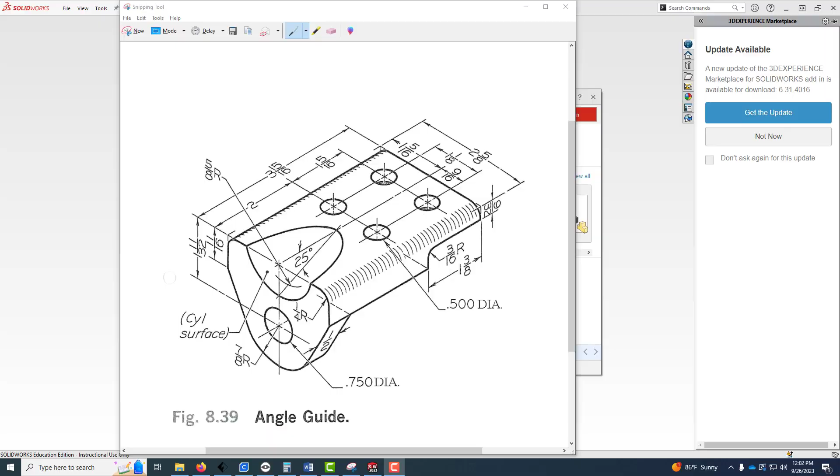Always get a game plan. Here, I'll start on the right plane with the mid-plane extrusion. Next, I'll add the end feature with the hole.

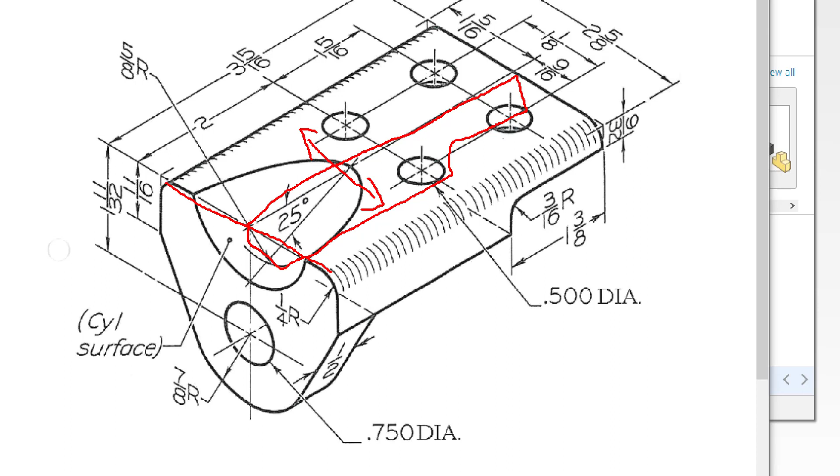This slanted cut is the troublemaker, but SOLIDWORKS allows you to define the extrusion direction. The holes are straightforward. I'll make one and pattern the others.

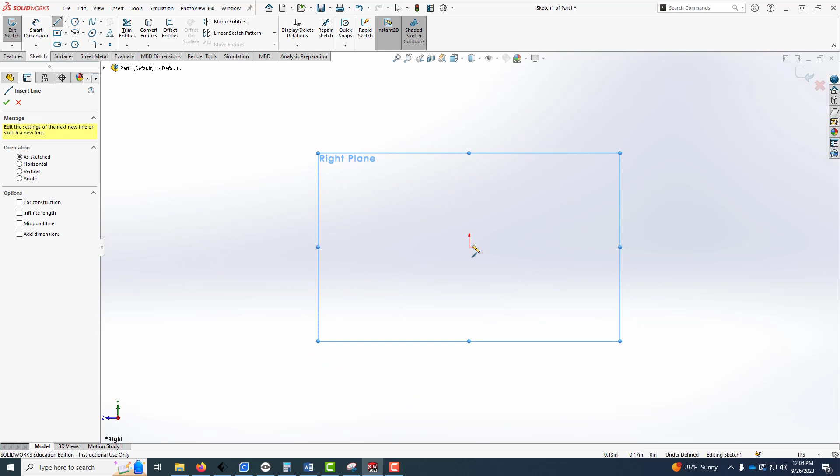Start a new inch part and sketch on the right plane. It's very important to fully define your sketches. Always anchor them to the origin and then add relations and dimensions.

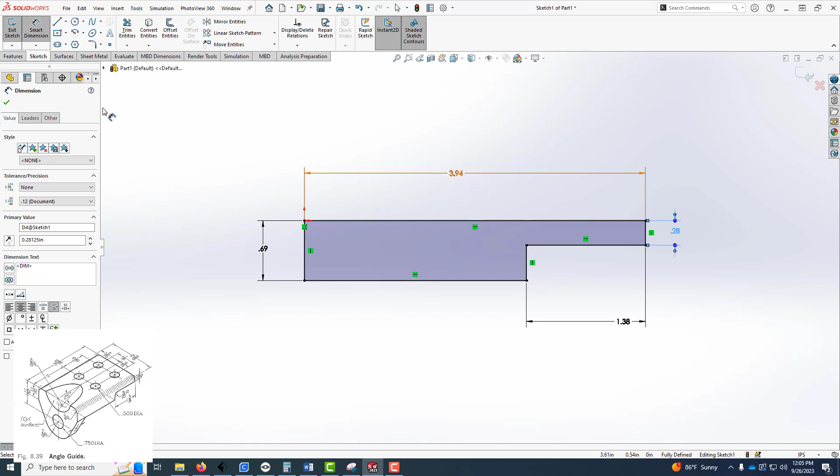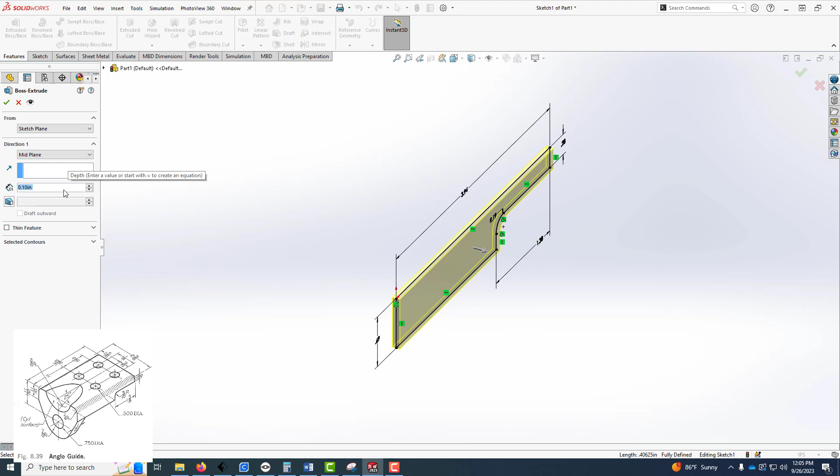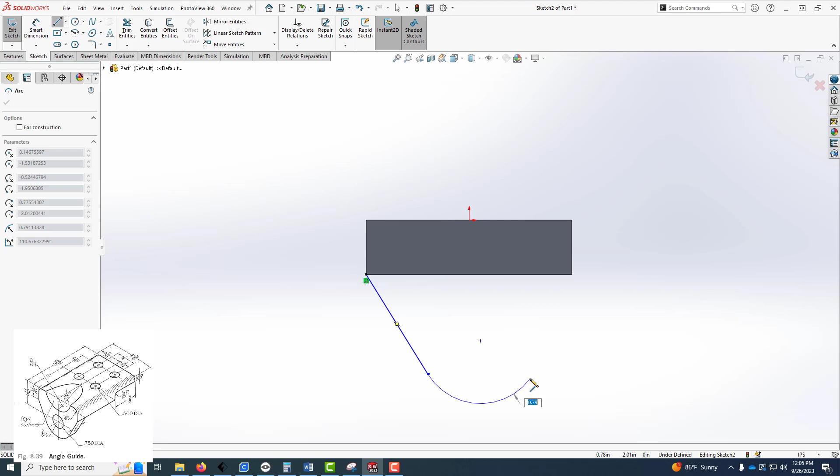I'll extrude this midplane, keeping my principal planes centered in the part. Start another sketch on the end face. Be sure to fully define it as well.

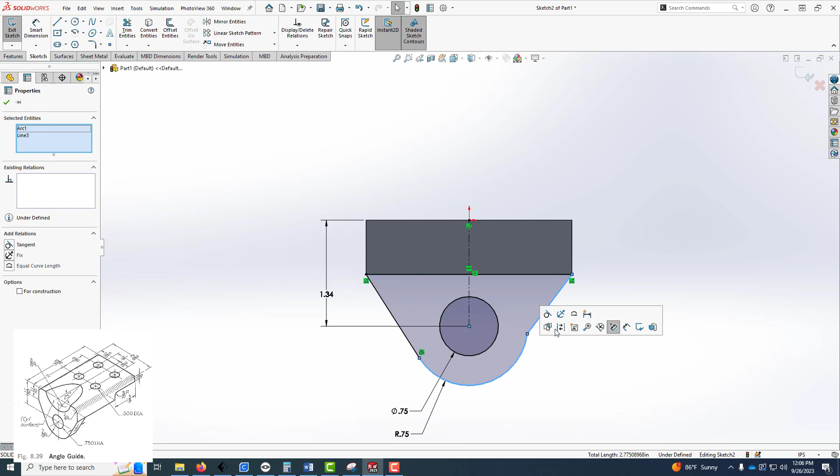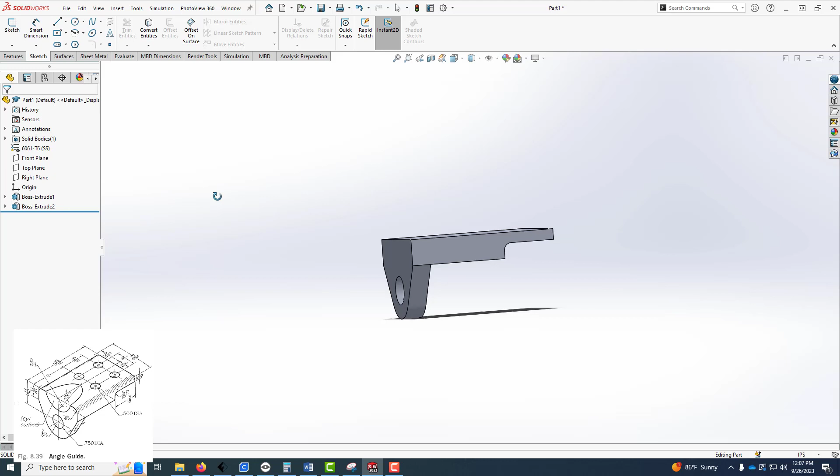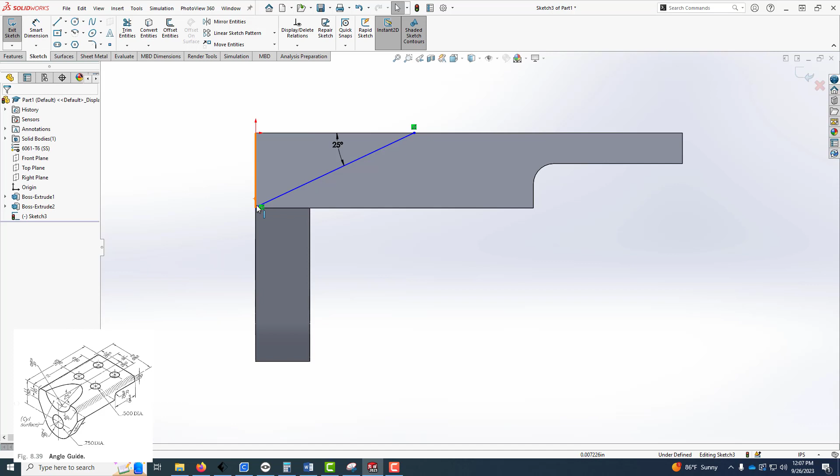Now I will create a simple sketch on the right plane to guide the angled cut. Add the dimensions and relations to fully define the sketch.

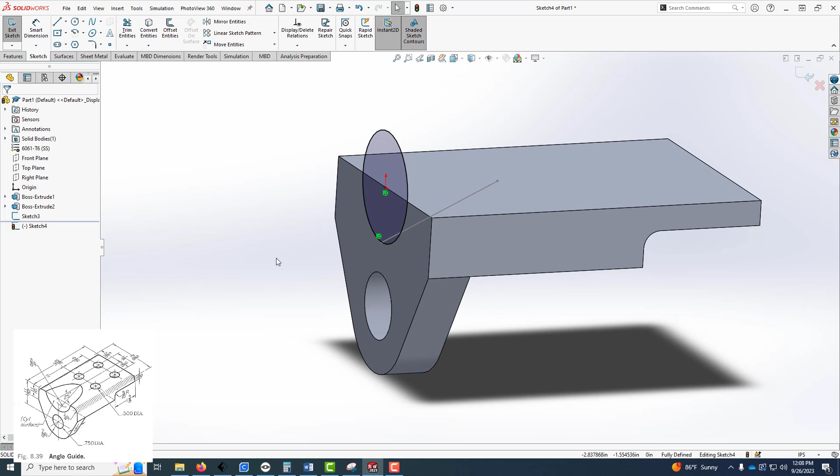Start another sketch on the end face. The circle's center point is at the origin and is coincident with the end of the angled line. Extrude cut the circle, but use this box and the angled line to change the extrusion direction.

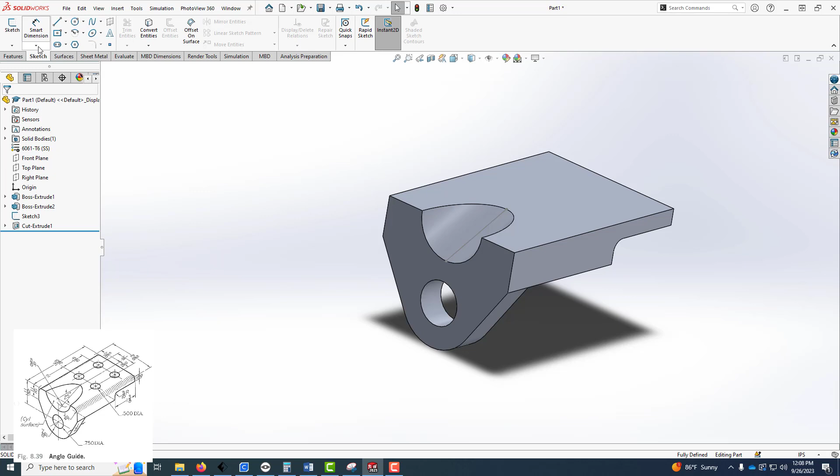Place a hole using dimensions, construction lines, and relations to fully define the sketch.

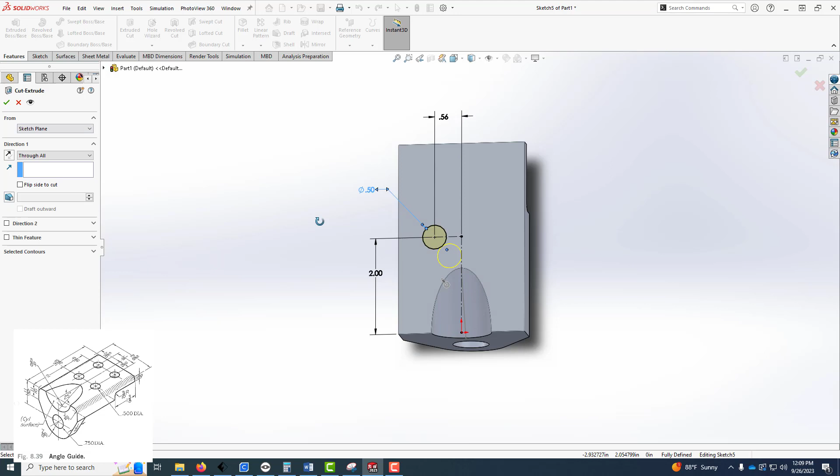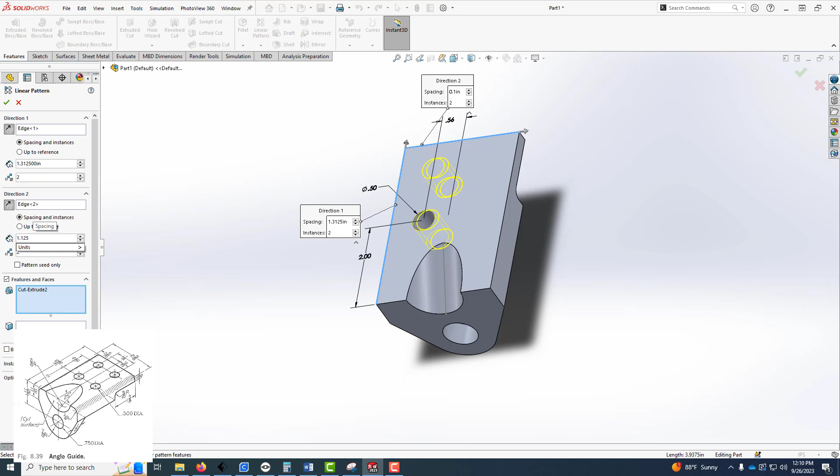Use the linear pattern to make the others. Finish by adding the 1/4 inch fillets.